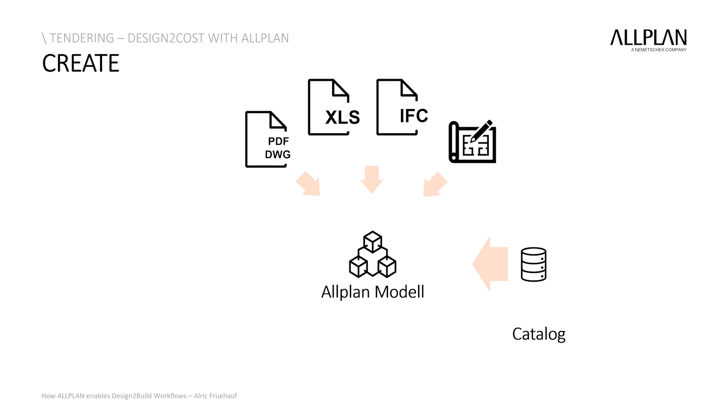However, many of our clients report that they often question the integrity of the provided models. As a result, they end up either spending much time on reviewing or creating new models based on the 2D plans they received. Imagine needing to recreate a model due to mistrust in the provided one.

With ALLPLAN, you'll transform this potential time-consuming process into a swift task, thanks to what we call wizards. You simply take over predefined object types, which allow you to create a model rapidly, including bid-relevant data.

Looking at different countries here in Europe, we see that in Germany, Nevaris, one of our sister brands in the Nemetschek group, creates highly efficient content called DBD Baudaten for all project stages complying with German standards. The same holds true for our users in Switzerland, who will need to adhere to the NPK standard, which they get pre-installed when working with ALLPLAN.

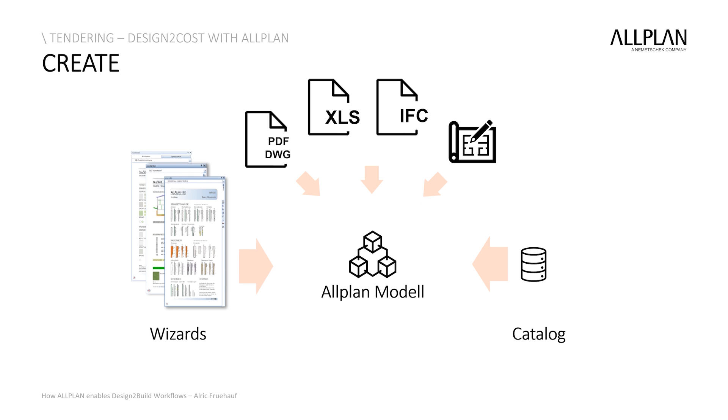Different countries, different approaches. Our construction customers in Italy and France usually prefer to derive those wizards or connected databases for themselves, based on their learnings in the past. Our local teams are always only a message away from supporting you in setting up the system according to your needs. And if you want to automate the creation of such models, feel free to use our existing tools or create your automation with Visual Scripting or via the ALLPLAN Python API.

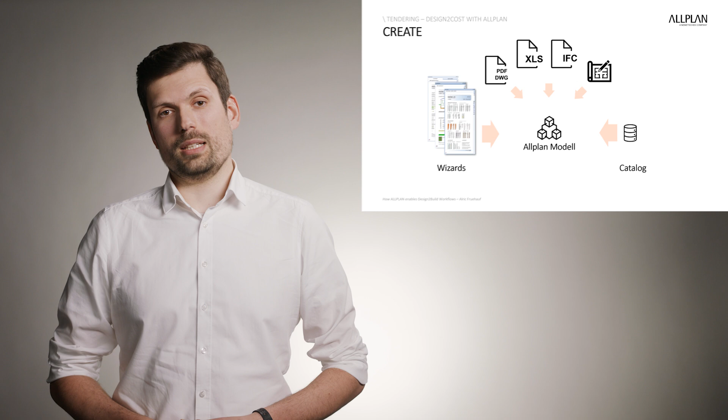Let's move on to the next stage of tendering, refining your proposal. This is where you can set yourself apart from the competition. One way to do that is to create alternative proposals. Whatever information you have around the model can enable you to refine that proposal to stick out. We know that a robust pre-construction strategy can be a game changer for construction projects.

A study by McGraw-Hill Construction, the American Institute of Architects, and the Lean Construction Institute found that effective pre-construction processes can increase the project's ROI significantly, reduce risk, and enhance productivity.

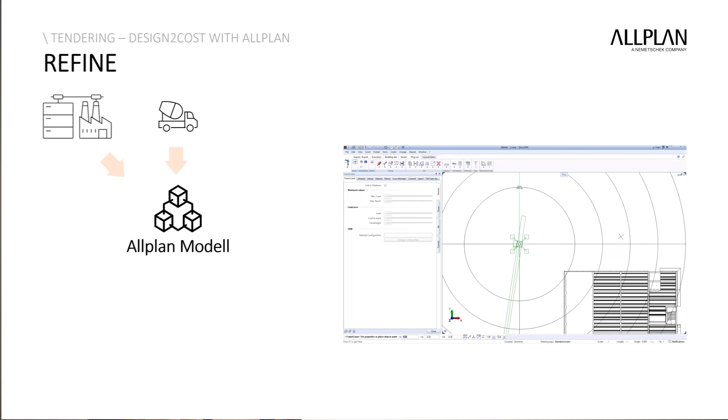Part of a successful pre-construction process is looking for methods that can increase efficiency, like comparing cast-in-place concrete versus precast elements. A report by McKinsey & Company about modular construction shows that using prefabrication methods can accelerate construction speed by 20 to 50%, especially when changing the mindset from looking at components as completely individual to specific products to be used many times across a project.

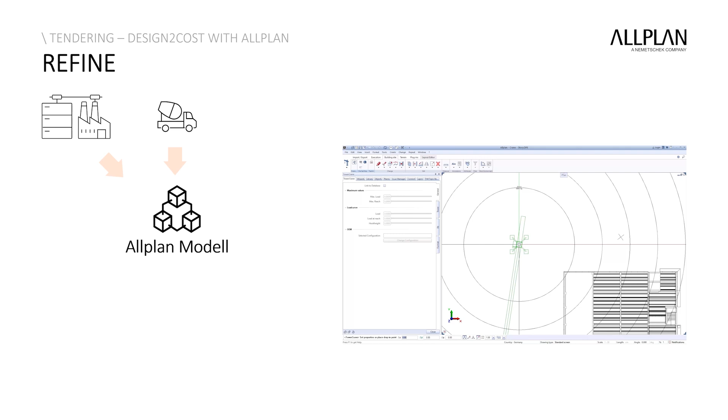This isn't just about creating a few prefabricated balcony plates, but planning full-blown prefabricated concrete buildings, and that is where ALLPLAN supports you in achieving a high count of repetition.

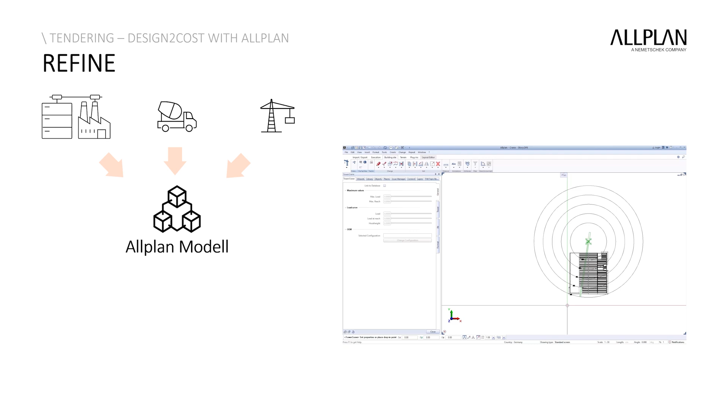Another subtle but effective way to stand out from your competition is by planning the construction site layout in 3D. Submit this with your tender. It's an assured way to impress your client with your use of innovative technology and control over the project from the get-go.

With pre-installed content such as construction fences, containers, tower cranes, it's easy to generate a viable site plan in no time with ALLPLAN. Talking about cranes, the strategic selection of crane positions is often done by your experienced planners.

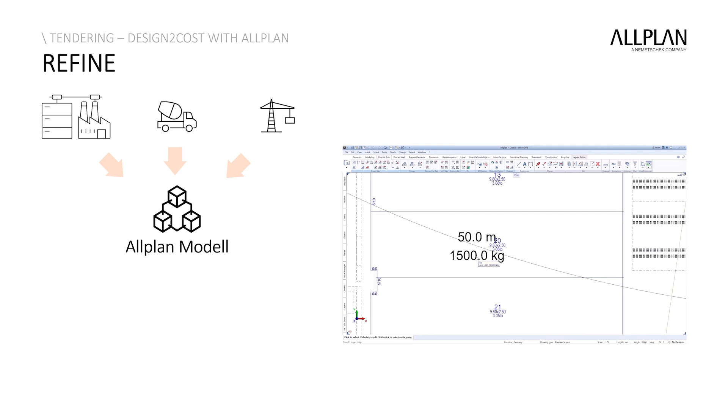Using ALLPLAN, your team can benefit from a crane database and cranes interacting with the model elements, as you can see in the video. Placing a crane will influence your prefabrication proposal. We can see here that, for example, those precast slabs will adapt to the maximum lifting capacity of the selected crane.

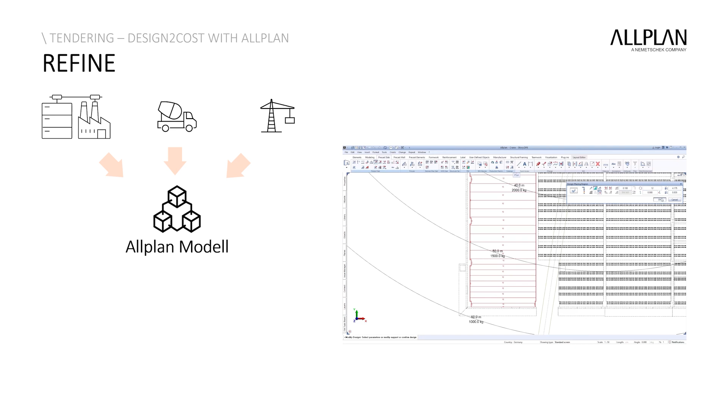As a final touch, you can add further construction equipment utilizing ALLPLAN's content connector to directly download content from the 3D warehouse. Deriving the visualization from that model is as easy as defining a few viewpoints and a camera path.

In summary, ALLPLAN provides the essential visualization tools that help you effectively present your plan, mitigate problems, and foster team alignment before the actual construction work even begins.

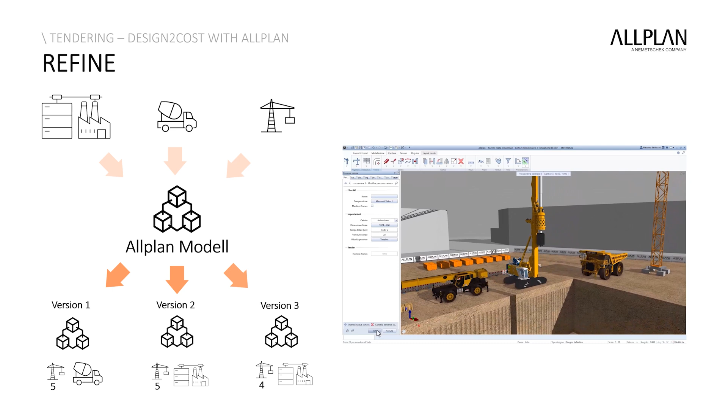As we transition to the final stage of the tendering process, it's time to consolidate all your efforts into a compelling proposal. Within our product portfolio, ALLPLAN enables you to take all the elements we've discussed - the model, site equipment, your proposed alternative construction workflows - and compile them into one robust documentation with detailed reports.

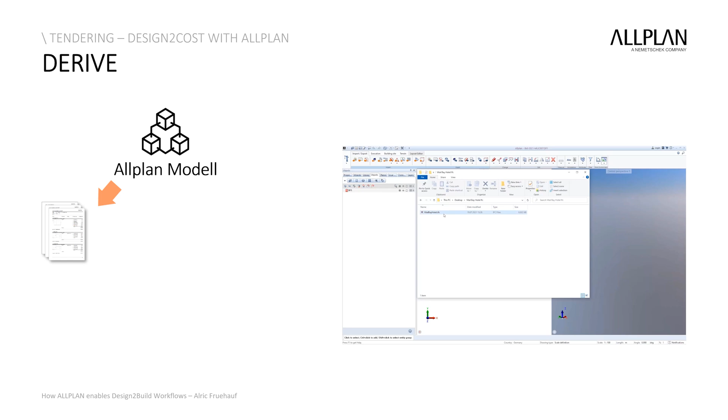Remember when I said in the beginning that our clients often question the integrity of IFC models they receive? Let's imagine we would have started out with a reliable IFC model.

As you can see in the video, once imported into ALLPLAN, your model is ready to be queried by those reports, reflecting either just the material or material and the related work items based on the attached database.

For instance, ALLPLAN lets you view concrete, not just as material, but as concrete plus reinforcement, plus formwork, plus specific finishing types you may need to deliver.

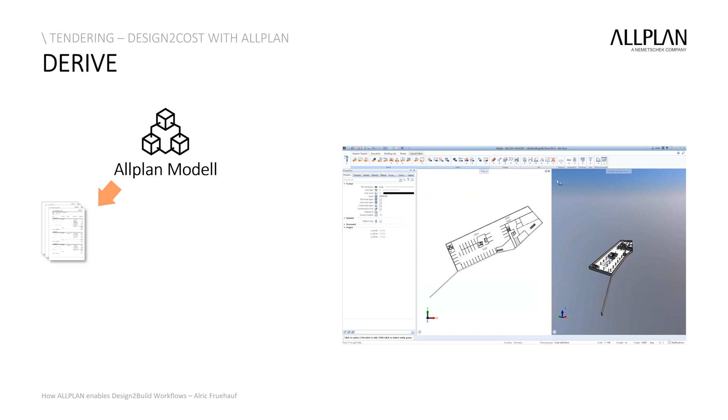That leads to detailed quantities derived instantly and dynamically updated with every model change.

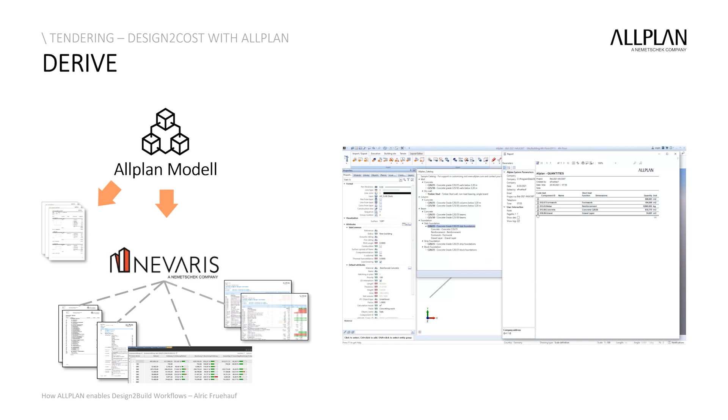For our users in Germany, Austria and Switzerland, Nevaris offers superb integration capabilities to derive not just bid documentation, but also cost controlling, variant comparisons, and invoicing during the construction phase.

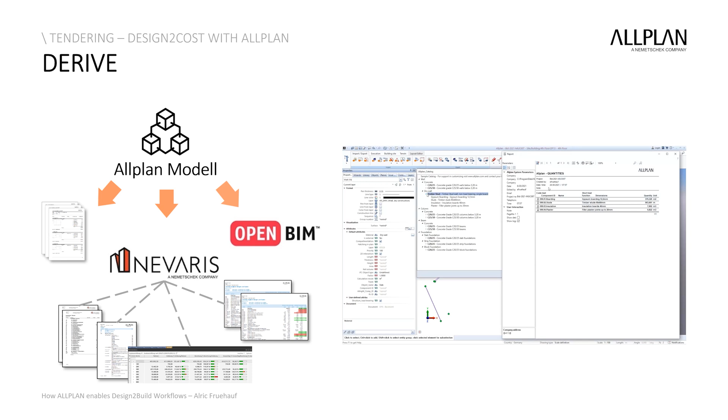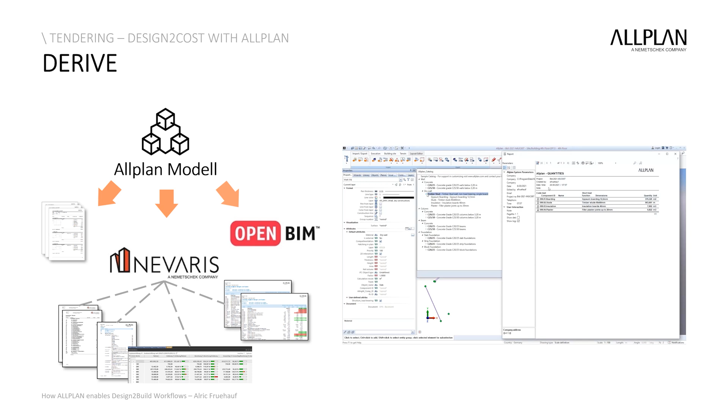Other open workflows using IFC or Excel-based data exchanges are used by other regional tools. That includes, for example, Orca in Germany, Abacus in Switzerland, Mastro 5K in Italy, and SOC Informatique in France, and many more. With ALLPLAN, creating a winning bid is no longer a challenging task, but a streamlined process that enhances your productivity while maintaining accuracy.

As we move from the tendering to the execution phase of a construction project, let's pause on the aspect of prefabrication as a crucial factor to reduce project timelines and cost once more.

Over the past few years, we've seen a significant rise in the industrialization of construction. The McKinsey report I mentioned earlier supports this by revealing that increased adoption of precast or prefabrication construction components can reduce project timelines by up to 50%, but at the same time, reduce costs by more than 30%.

This trend isn't just an evolution. It's a revolution that promises improved productivity, safety, and quality of structures. And it's here to stay.

At ALLPLAN, we understand the importance of this shift towards more efficient building practices, and we offer a comprehensive toolkit to facilitate this transition towards industrialized construction. Our solutions are designed not only to assist you with creating detailed models for prefabrication, but also to work closely with prefabrication companies and aid you in planning your construction site effectively at a very early stage.

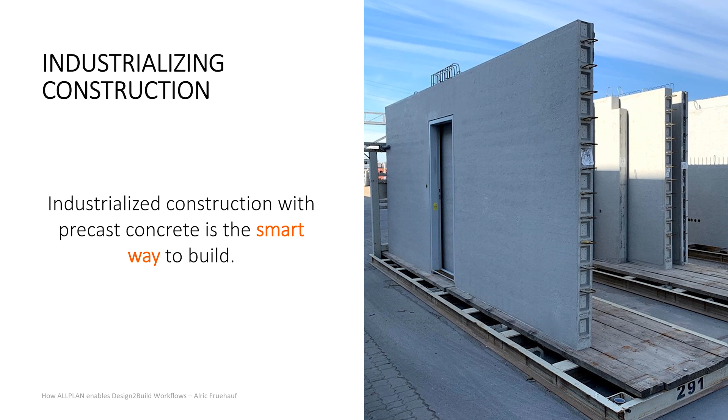We highly recommend adopting these practices to both construction companies and general contractors. Capitalizing on this rising trend of prefab allows you to take part in the transformation of the industry that's underpinned by digitalization and automation. Stay tuned as my colleague will dive deeper into the world of prefabrication later on and highlight how ALLPLAN can be your smart assistant in this transformational journey.

Transitioning now to the final part of this presentation, you have secured the project and it's time to execute. This is where our Design2Build workflow really proves its value, bringing everything together for the most effective delivery of any construction project. We take the models and data we have gathered during the tendering phase and put them to work, further detailing to ensure our site personnel is prepared for optimal execution.

I'll cover 3 topics today: groundwork, formwork planning, and collaboration. Let's go. As we've demonstrated earlier, ALLPLAN makes it remarkably easy to create models for both the unfinished and the finalized structure.

This capability extends underground too, enabling you to plan and visualize excavation pits in a comprehensive 3D model. Our commitment to multi-material modeling means that you can represent more than just a hole in the ground.

You can design necessary retaining elements as well, such as bored pile walls, soldier pile walls, and ground anchors. I'm also excited to hear your feedback on the workflow to plan sheet pile walls. We just launched it with ALLPLAN 24-1 as a technical preview. Go check it out. Once these elements are defined and you have collaborated with engineers to ensure structural stability, the 3D model you and your project partners created becomes an invaluable resource for your site team.

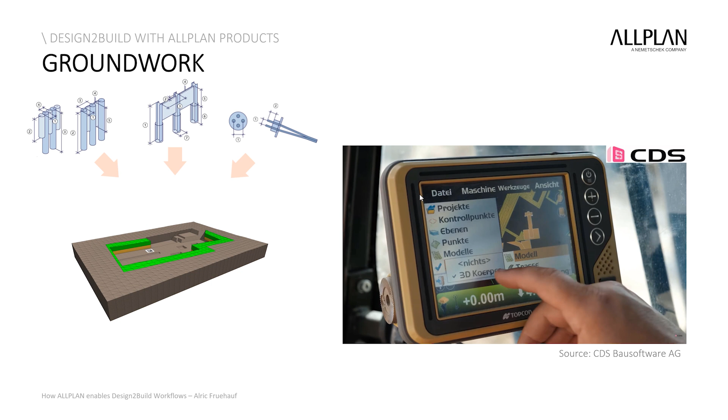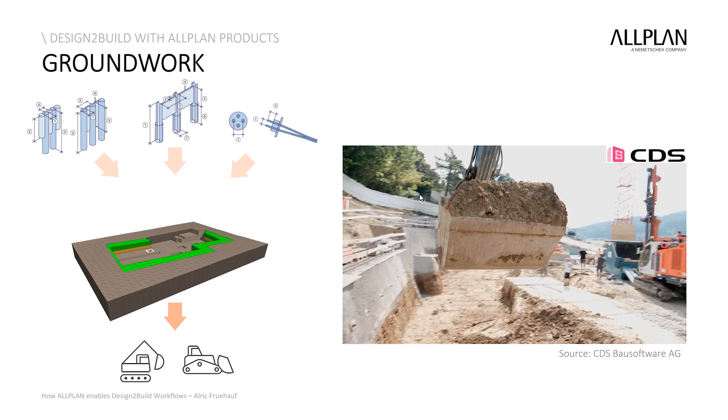Exports of those retaining elements can be imported to drilling machines directly to identify the correct locations for those elements on the real construction site. The same holds true for terrain data, which can be handed over to excavators directly in form of DWG or IFC.

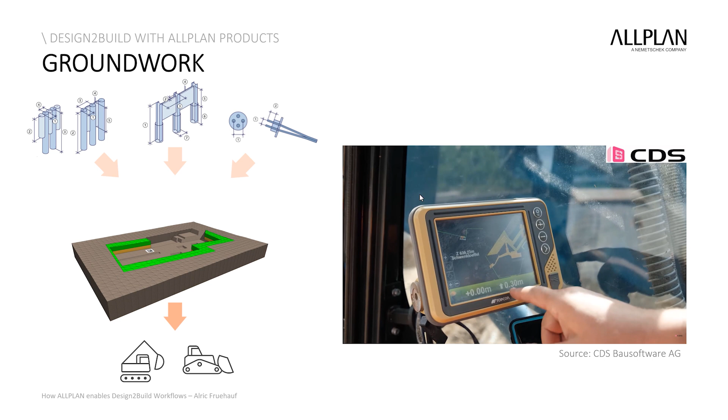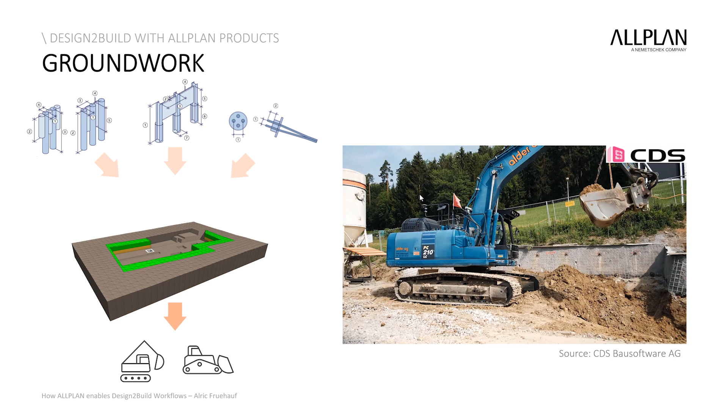In this video, our Swiss partner CDS Bausoftware demonstrates how excavators use the 3D model data generated from ALLPLAN to guide their work. All this moves us a significant step closer to a paperless construction site, a transformation that will dramatically improve efficiency and accuracy in the field.

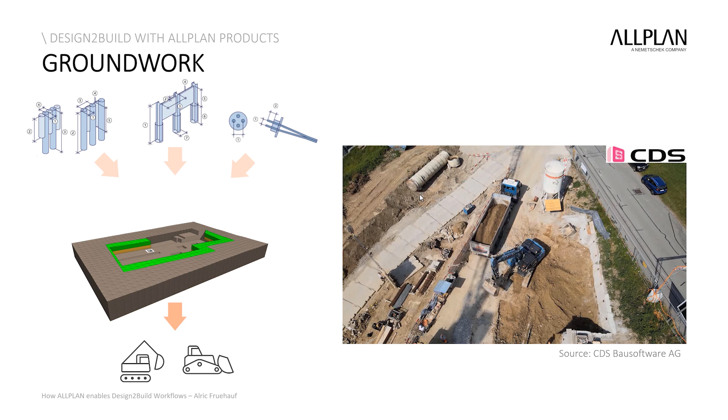As we will see in Patrick Miley's presentation later on, this is just the beginning of what digital-driven construction workflows can provide. My only hint? Bimplus and Leica equipment will play a role in the story he will tell.

Formwork planning is an area where we recently have focused significant development efforts. In the current market, you have the choice of renting versus owning formwork, as well as sourcing out the planning to manufacturers or creating formwork plans in-house. As each manufacturer maintains their specific tools to plan with their systems, you may see a break in your workflows or face additional onboarding time for your teams.

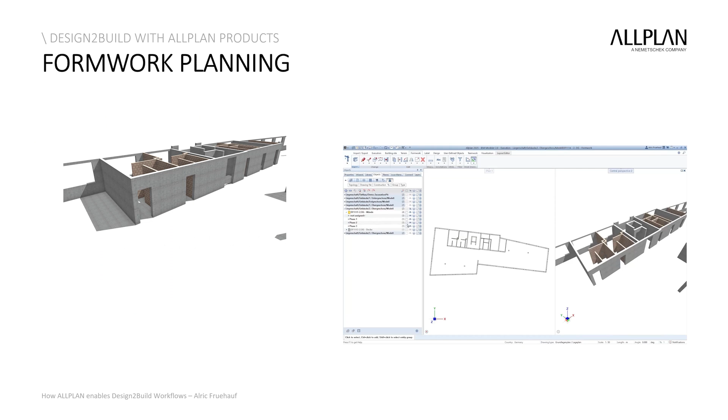Recognizing this, we have, in collaboration with our partner BIM squared, implemented an independent approach to formwork planning. The same workflows are applicable to different manufacturers. With ALLPLAN 2024 released the first supported formwork system, MEVA Mammut 350.

In the 24-1 release of ALLPLAN, we expanded our formwork planning capabilities to include MEVA Mammut XT and a second manufacturer I'm sure you all know, PERI. The first PERI system we offer is Trio. Keep your eyes open for further announcements later on in the year.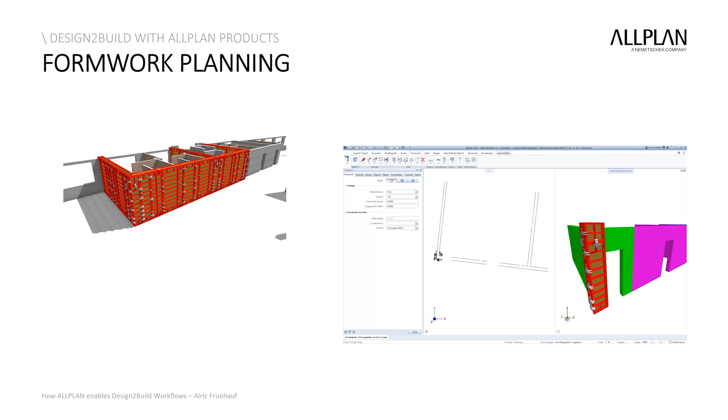As you can see in the video, the preliminary work carried out during the tender stage can be seamlessly integrated into formwork planning. Splitting model elements to reflect different construction phases and visualizing those is the first step. Then, setting down the boundary conditions for the formwork by assigning corner elements to all wall intersections. And finally, filling up the formwork in between will provide your teams with a quick visualization and a piece count.

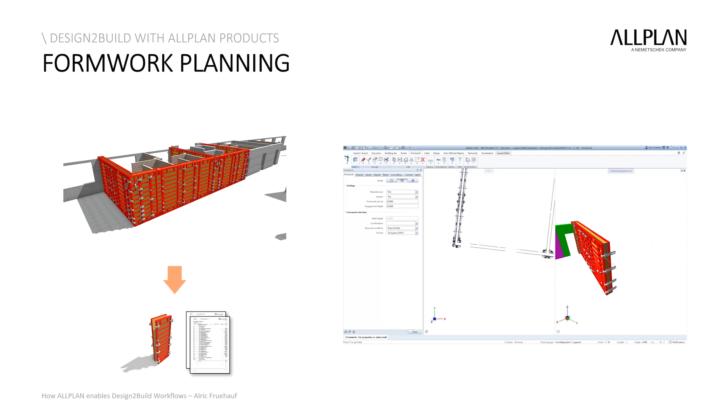Assigning phase attributes and pulling reports of the formwork helps you to normalize the amount of formwork elements which will need to be available on site. As a result, your formwork planning process is streamlined. Time and money is saved while reducing external dependencies, and by that, enhancing the internal control.

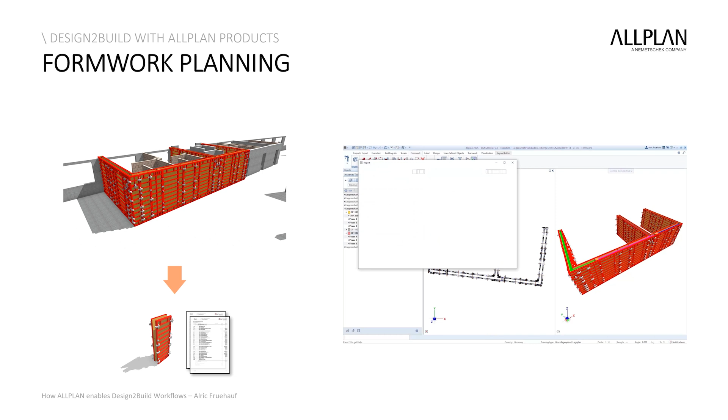Talking about timing on construction sites, I've heard of many different workflows from different customers, how they schedule their construction activities. Using the classic Microsoft Project to create Gantt charts, connecting models to those via Bimplus, or even creating a collaborative schedule via Last Planner and Lean construction principles.

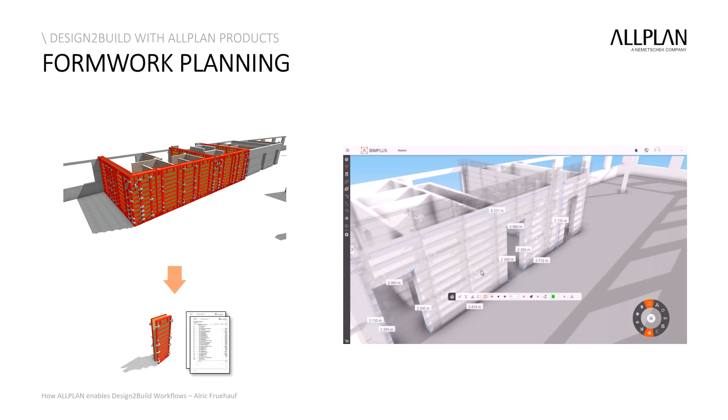Moving beyond the planning into the execution phase, collaboration among your construction team on-site as well as your office-located teams becomes vital for ensuring project success. Traditionally, 2D plans were provided to site workers. There is, however, a more modern, efficient method of collaboration, sharing the model via the cloud.

With our cloud offering, Bimplus, measurements for blockouts can be easily derived from the shared model on-site, and if required, replanning can be requested directly in the model. This modern collaboration method not only promotes efficiency, but also makes communication more agile and accurate.

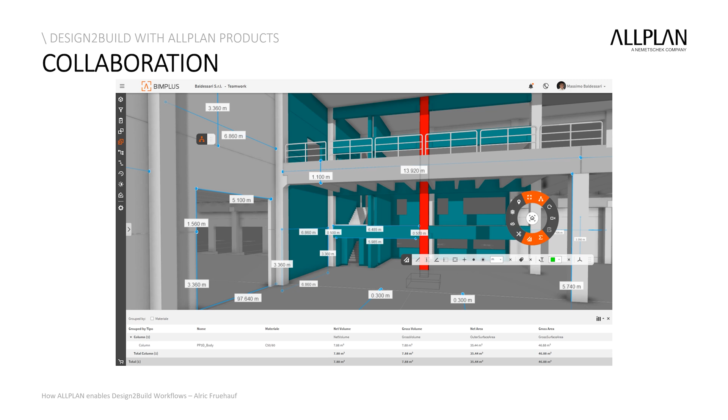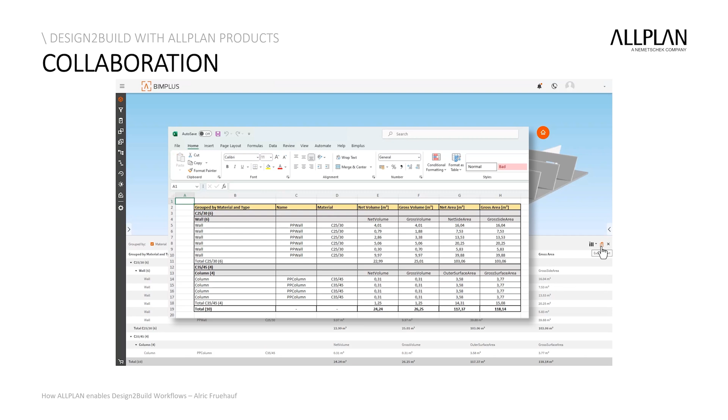What's more, Bimplus allows you to select elements, extract the full detail of quantity, and even export this data to Excel. This functionality promotes more accurate, in-time ordering and better collaboration between the site and local delivery companies, thereby avoiding delays and reducing waste. We understand that transitioning from traditional to digital methods can be challenging.

To support those accustomed to the 2D world, we've launched an overlay manager tool that allows for seamless overlaying of 2D plans with 3D model, bridging the gap between old and new practices. This means that whether your comfort zone is 2D or 3D, ALLPLAN equips you with the tools to work efficiently and collaborate effectively on desktop and in the cloud.

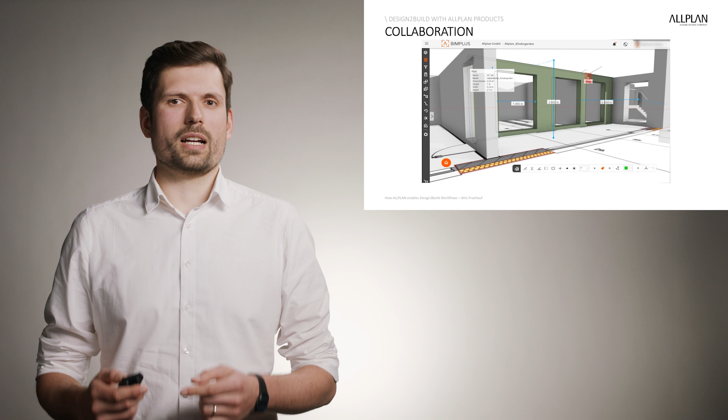As this presentation is coming to an end, I want to emphasize that we as ALLPLAN bring the tools. But adapting your working culture and those of your team is the most critical part in staying relevant in those fast-changing times. Every step towards modernization counts. Every incremental improvement paves the way to future-proof your company.

Consider companies like our customer KIBAG in Switzerland. They've made great strides in enabling their on-site personnel to access and share model information directly from the cloud, facilitating a tighter collaboration with all project stakeholders. Stay on to hear more from their experience in a later presentation.